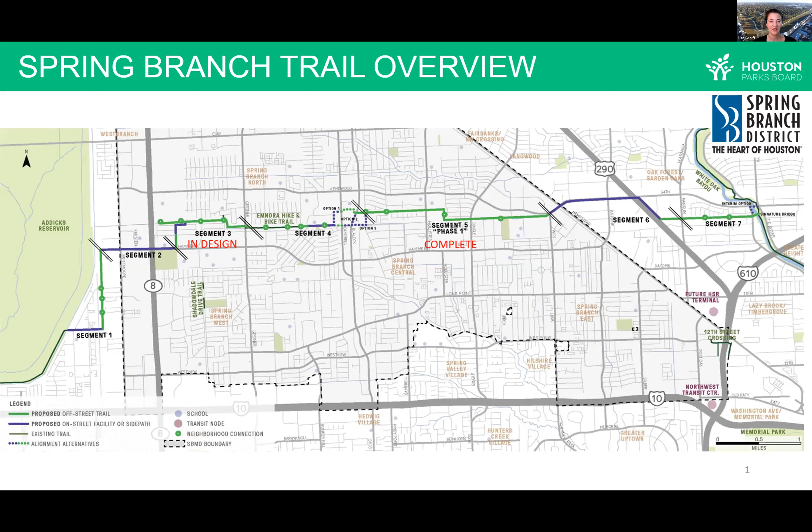The trail is being accomplished through an agreement between CenterPoint and the City of Houston that was signed in 2014. This agreement gives the City of Houston the ability to build trails on CenterPoint easements, with a few restrictions that you can see on the screen.

So it's a 10-foot wide concrete trail with kind of park rules, open dawn till dusk. It's mainly for walking and biking and passing through. It has a maintenance area on either side, with limited planting and other restrictions along the trail because they are CenterPoint utility easements.

You can also see on the screen that Houston Parks Board is involved - after the agreement was signed, we accomplished the pilot project off of Sims Bayou Greenway, which opened in 2019. You can see the opening there, and behind me is a photo of the Spring Branch Trail, the portion that has been completed.

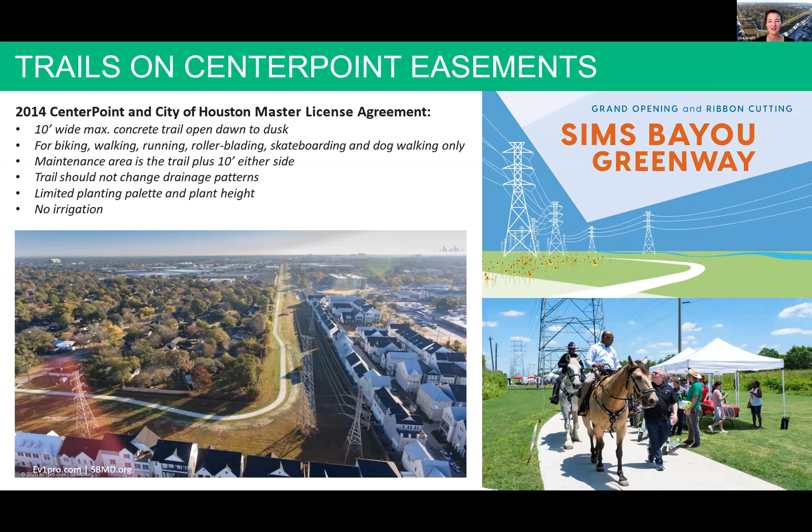Some of the amenities we are providing on these trails, typically similar to the Bayou Greenways, include mileage markers that double as 911 markers, so if you call 911 and give them the numbers on the little disc, they'll know exactly where to come and find you when things go wrong.

There's also signage similar to Bayou Greenway - you can see an image there of me and my dog, and a kind of gateway sign. Those are gateways or connections into the neighborhoods and parks that give you maps, information, and rules. Then there's directional signage and stop signs.

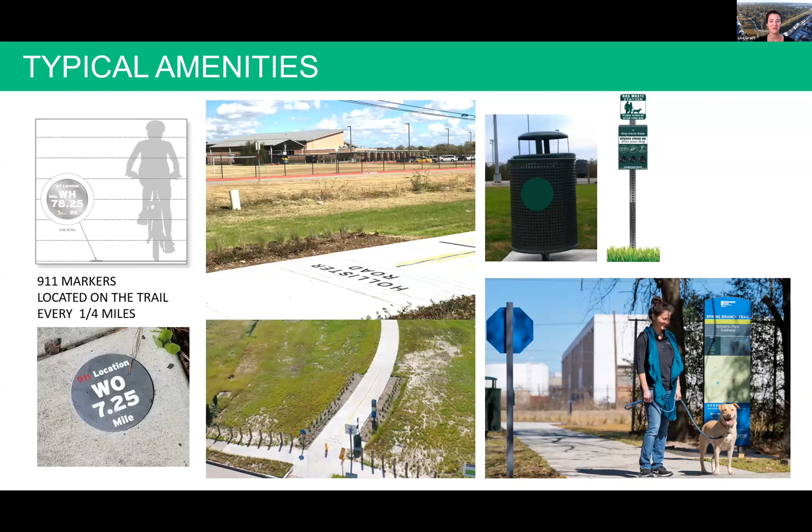At trail entrances there are bollards to prevent cars riding on the trails, as well as signage and some upgraded landscaping, plus dog waste and regular waste stations. So that is typically what you'll find along these trails.

At the same time the Spring Branch Management District was working on their comprehensive plan, Houston Parks Board was working on Beyond the Bayous and also identified this project as a potential important connectivity project in the area. The Beyond the Bayous study is a region-wide parks plan that connects greenways, trails, and parks of all sizes across Houston.

The goal really is to connect people, parks, and nature together throughout the region. The idea was that we started and created these amazing Bayou Greenways, 150 miles of trails that can connect up, and we wanted to really extend those benefits throughout the region and open up green space equitably so that people throughout the region can get to them and enjoy them.

On the screen you can see our regional connected network of greenways, and we had identified the Spring Branch Trail as one of the major ones. We are excited that a portion of the trail is underway - the total segments within Spring Branch Management District. We're really happy to be working with them and their vision for creating this trail within their area, as well as taking on the maintenance of it, which is extremely important.

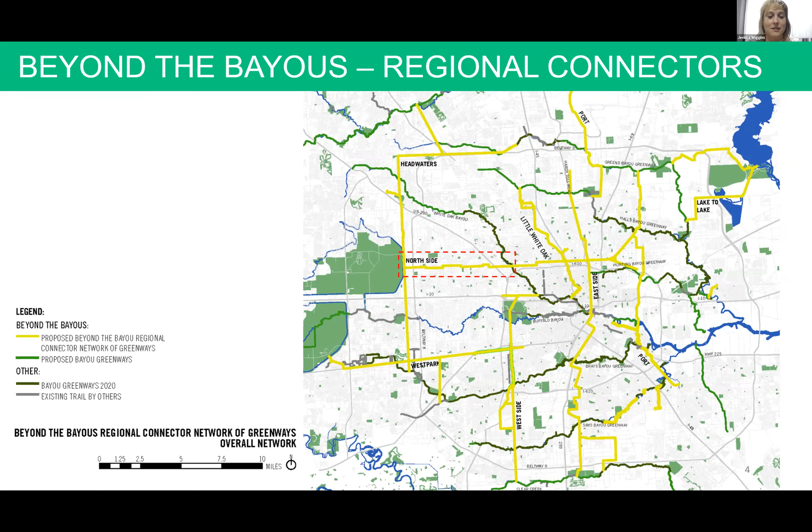Thanks so much, Lisa. That's really awesome that we're getting these regional connectors, connecting our bayous that really run well east-west, but making sure that we're connecting to things north-south and then beyond to bigger parks is really important. So thank you for that.

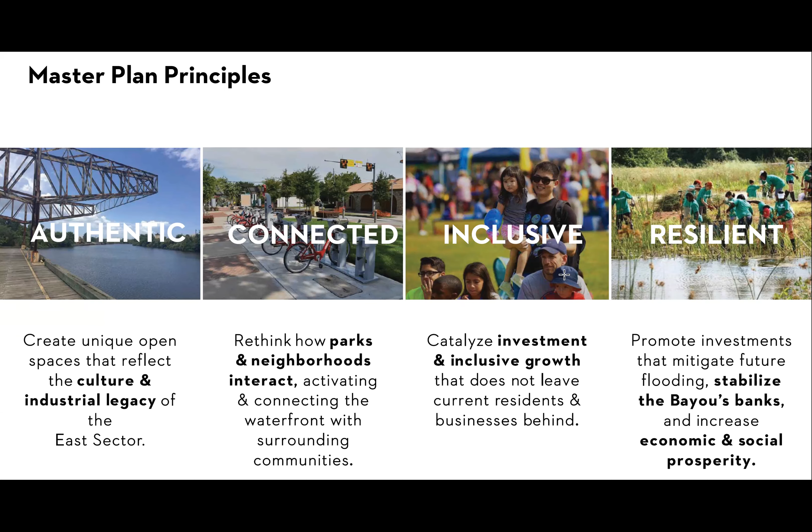So the master plan itself covers the area from essentially US 59 to the west, to the Port of Houston turning basin to the east. And the master plan identified about 43 miles of on- and off-street bikeways within this area.

In some instances, those are things we'll be doing ourselves, if it's on private property or we have an easement. In other instances, we'll partner with the East End District, Harrisburg TIRZ, Fifth Ward Redevelopment Corporation, Fifth Ward TIRZ, entities like that, to really implement this plan — along with the City of Houston, Harris County, a whole cast of characters to make this happen.

As I mentioned, right now we have some infrastructure and bikeways running east-west. The first priority is really to finish that network so you can travel east and west along the bayou. But just as important are the connections running north-south.

So people in the Fifth Ward can make it into the Second Ward, into Magnolia Park, up to Denver Harbor, and so on, so there's much more connectivity north-south. All of those neighborhoods then connect back to downtown and the entire bayou trail system we built through downtown and Buffalo Bayou Park, and then also to trails like the White Oak Bayou trails that Houston Parks Board have built, and some of the trails further south on Brays Bayou.

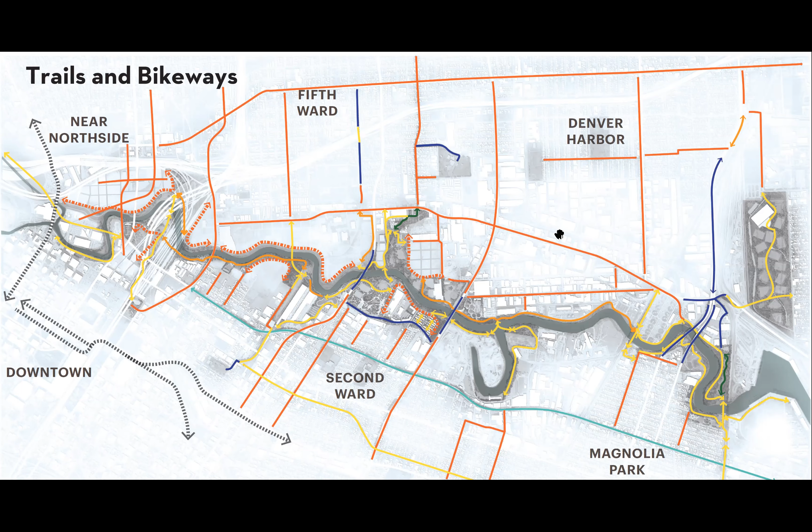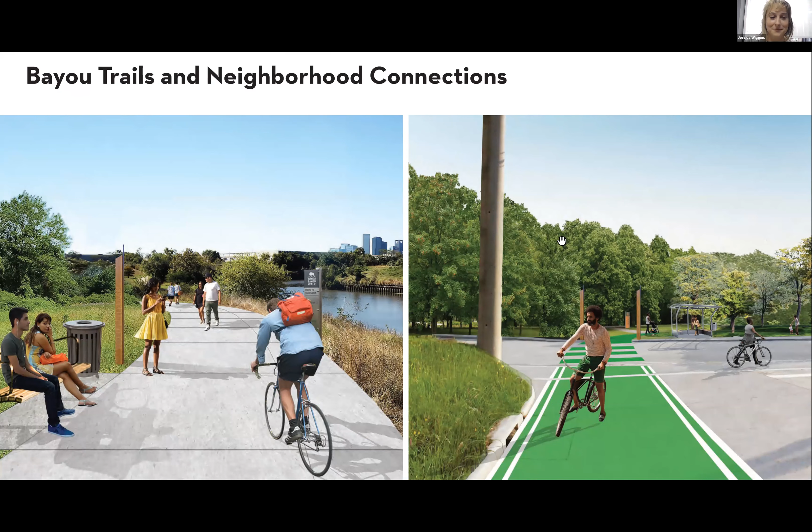So really connect this area to the whole Bayou trail, or the whole trail network in the city in general. The first thing we're really focusing on is the Bayou trails, and then connectivity in the neighborhood. And then the other big piece is really transforming navigation basically into a linear greenway, taking the excess capacity of navigation and making it into an amenity for the city. We actually just received a partnership grant from the Harris County Precinct 2 on this project. So that covers what we're doing, Buffalo Bayou Partnership.

Hey, Jose, that image looks familiar.

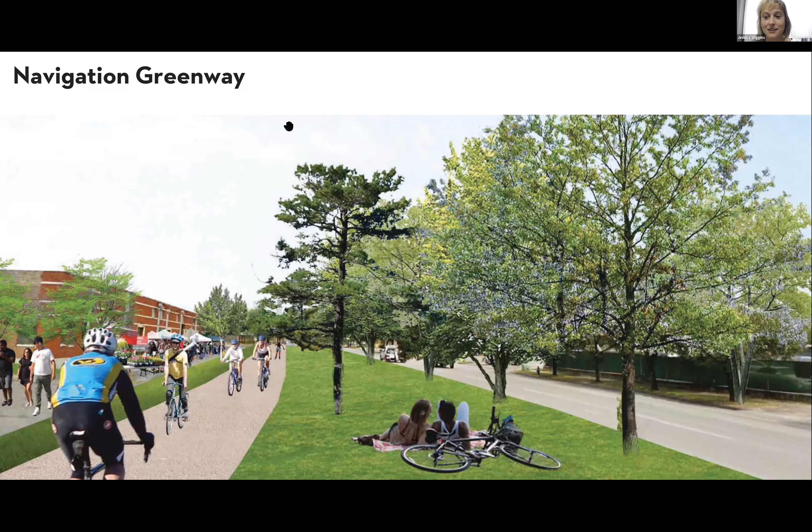Yes, that's awesome work. Thank you so much, Jose, for giving us an idea of what we have to look forward to from the Buffalo Bayou Partnership.

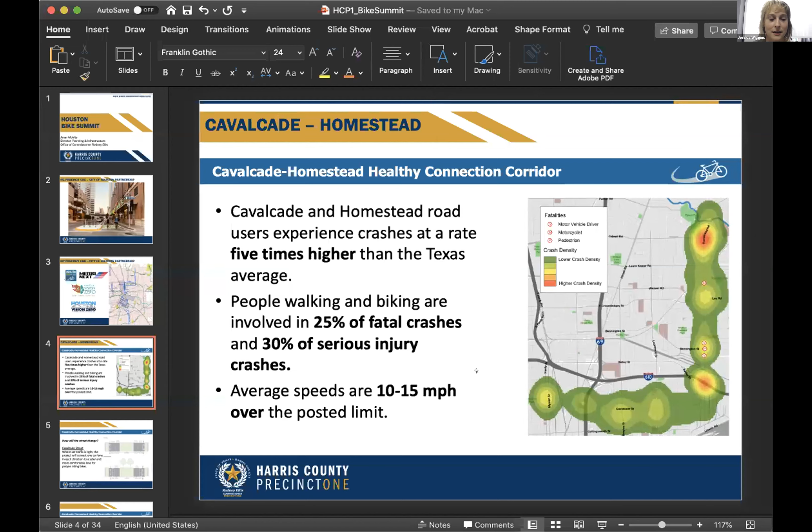Next up is someone who was my partner in crime when thinking about the Bill 50 Challenge, and really has helped spur some of Houston's first on-street bike lanes. I'm so excited to introduce Amar Mohite, who is the Director of Planning and Infrastructure with Harris County Precinct 1. Go ahead, Amar.

Thank you to Bike Houston and everyone, and Jessica for inviting me to the Houston Bike Summit. It's a pleasure to be with this group of members, panelists today. In 2017, I had the opportunity to join the team of Commissioner Rodney Ellis.

One of the early tasks I had was to jumpstart the implementation of the bike plan. After having completed the bike plan, it was a great opportunity for us to be able to implement these projects that came out of the bike plan.

Based on that partnership, the first Bill 50 Challenge and the partnership with the City of Houston, Harris County Precinct 1 implemented the first 18 miles of bikeway. We had just finished substantial completion on Austin 2 weeks ago. So it took 3 years to implement the project, but that one project connected 18 miles of high comfort network, connecting 3 complete communities, 3 major Bayou Greenway corridors, 4 universities, 11 schools, and educational facilities.

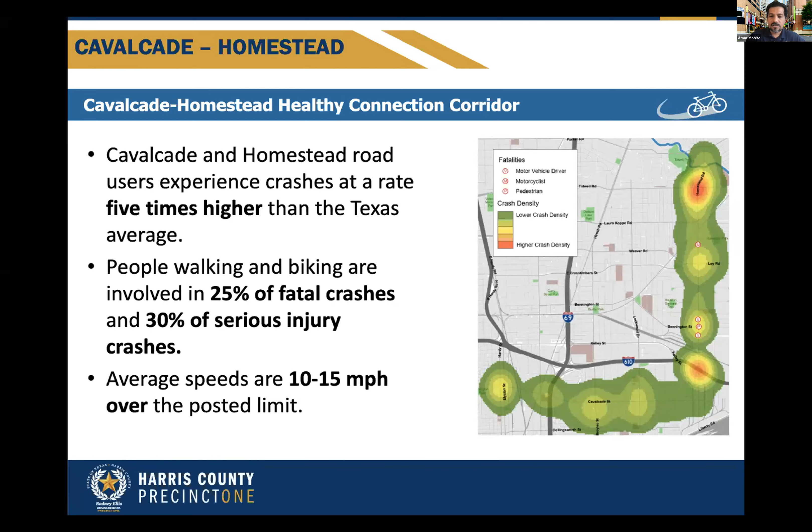So we are looking at how do you right-size the street. This would be implemented in a similar quick build fashion, but we would go through full design, with design and construction drawings on these projects.

On Cavalcade, we would be changing it from a 4-lane boulevard cross section with a 4-foot bike lane to 1 lane in each direction and a bike lane, which would improve safety.

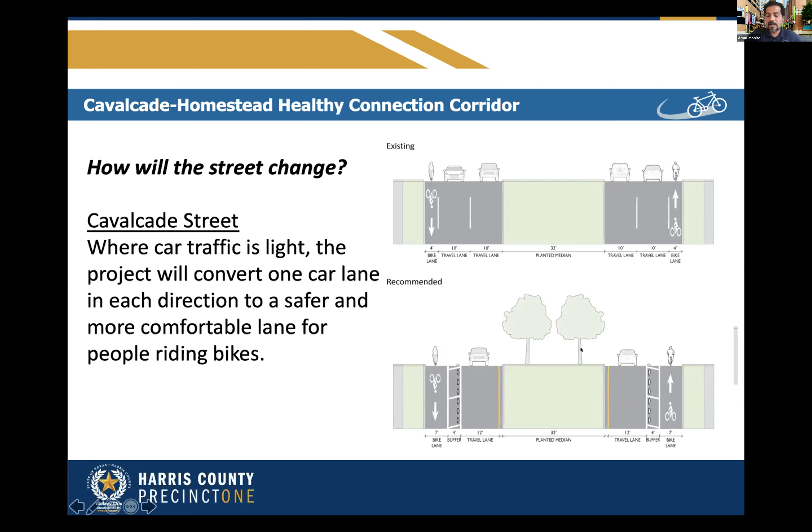Homestead is similarly a 6-lane boulevard, and we would be making it a 4-lane boulevard, allowing for a dedicated bike lane, similar to what we have with precast curbs, like you see on Austin Street. It won't be 2-way; it would be a dedicated 1-way bikeway along the segment.

As part of that, we are also working with Houston Parks Board and Harris County Flood Control District. We are also extending the Hunting Bayou Greenway all the way from Lockwood to Homestead.

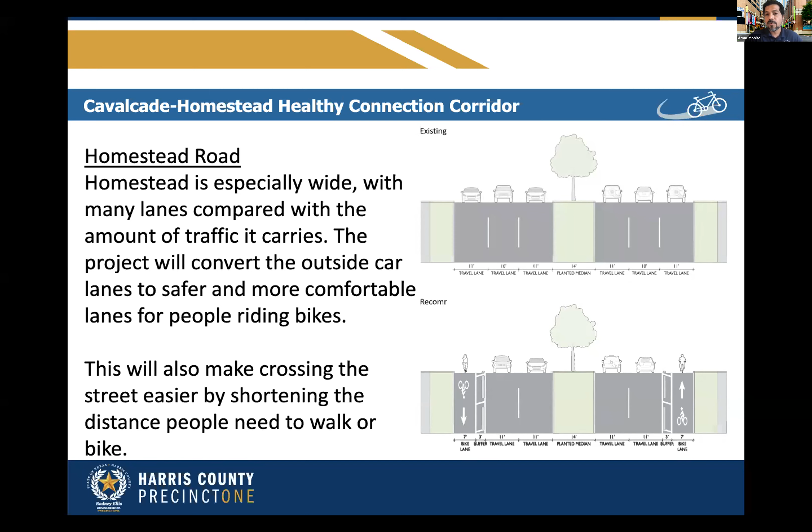So there would be a Bayou Greenway connection along this corridor. This also helps us improve safety, and as you can see from this slide, it significantly reduces the distance for people crossing the street.

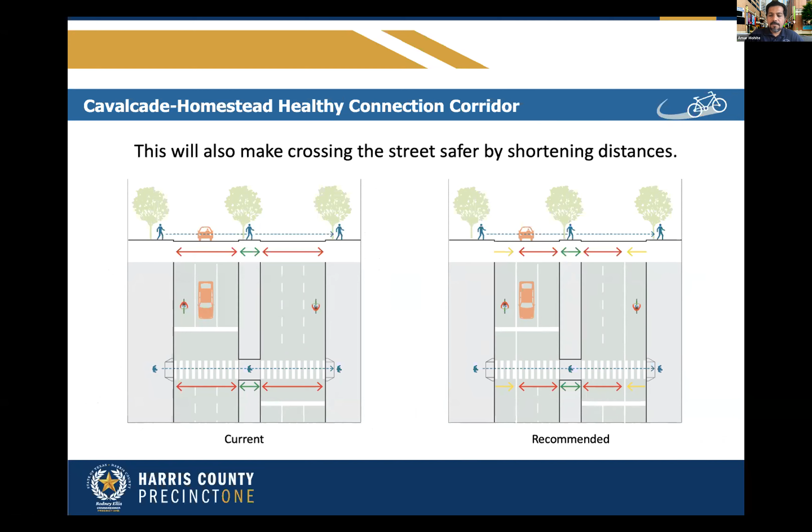I want to summarize and give you an overall picture of what Precinct 1 is doing beyond the 18 miles. This is part of an overall 30 miles of bikeways, trails, and 4 bridges being in various phases of study, design, and construction right now. I think 25 of those miles are within the city of Houston, and another 5 miles in the unincorporated area.

I'm very happy to share that we are doing our first protected bike lane. We're ready to award the project to a contractor in unincorporated Harris County, and I'm really excited about expanding this infrastructure to unincorporated Harris County as well.

So the big thing about this is partnerships. Partnerships are important. It's the best way to help implement projects within our region, working with multiple partners. So thank you, and I'll pass this back to you, Jessica.

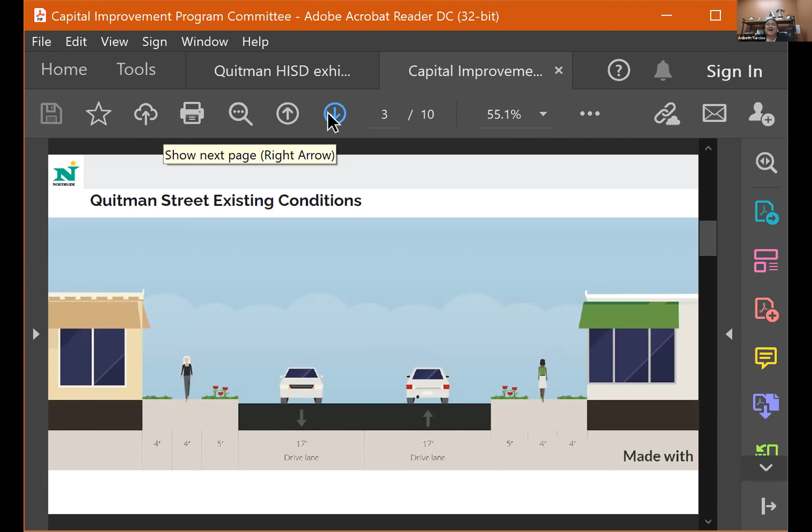So the management district ended up applying for the Houston-Galveston Area Council TIP call for projects. We received the grant back in 2015, and it talked about a lot of the enhancements we're going to do as far as pedestrian-oriented lighting, ADA ramps, crosswalks, but it was only going to be from South Street to Gano Street.

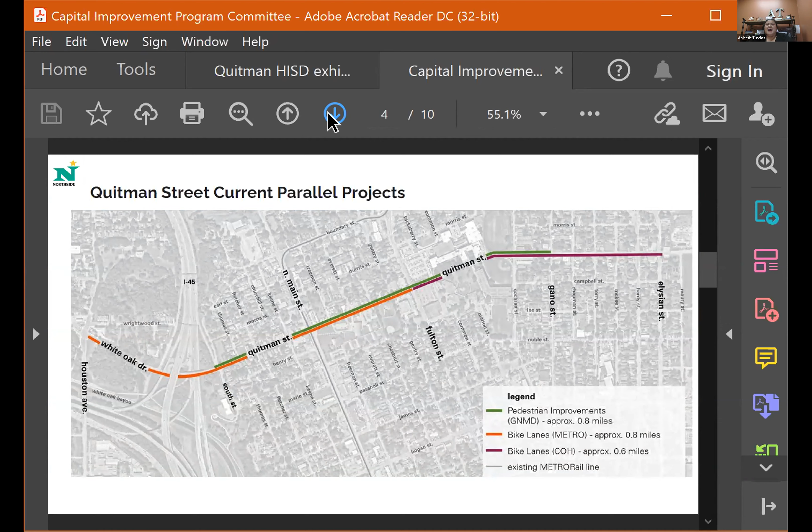One of the things we discovered as we talked more about this opportunity with the TIP grant was that the city and Metro were also working on parallel projects along Quitman, not to the same extent as where we were looking from South to Gano, but in the outskirts of Quitman. So we started talking to all of our partners.

And from all those conversations, this actually became a partnership project. The project now entails Commissioner Adrian Garcia, the city of Houston, and the management district. Within the district we've been partnered with a lot of organizations because of what was going on with Quitman and all the parallel efforts. Then Metro came in and said, hey, we want to be a part of this project too. So now with all the partners together, this is going to become a grander scale project.

Just to give you an idea of the numbers: when we received the HGAC grant, we received a total of close to $2 million in funds. Now, with all of the interlocal agreements with Metro, Commissioner Garcia, and the city of Houston, it's going to be a project of about $6.7 million.

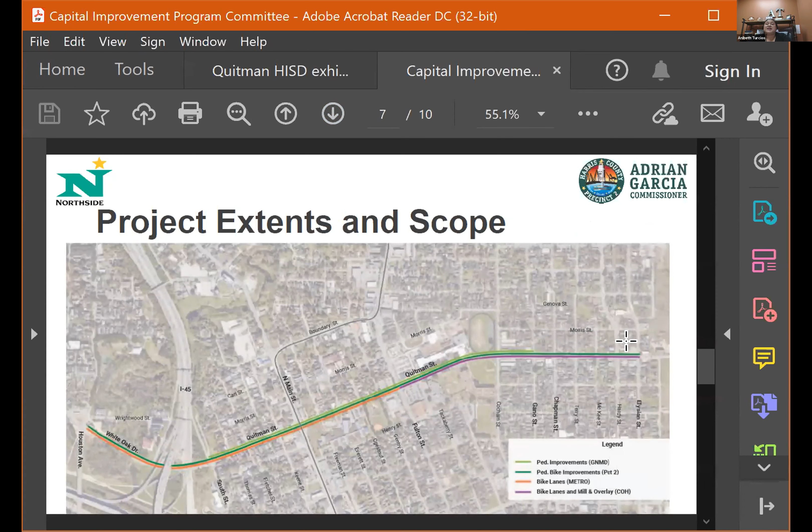So to give you a scope now, the project has gone from south to Gano, and is now extending from Houston Avenue to Elysian. This actually connects over to a project Amar mentioned earlier with Elysian and Hardy, which Jessica mentioned was one of the catalyst projects here in the north side. So now with Quitman, we're able to connect it over.

Just to give you a proposed section of how this will look: the Quitman drive lanes will now be reduced to 11 feet, and bike lanes will be 6 feet. We're actually looking at doing bi-directional bike lanes.

This is the first time in the north side that this will exist, and in Houston there are not many of them either, so this will definitely be a catalyst project. There will be 6-foot sidewalks and some landscaping, and because of the partnership with Metro, there will also be a few sections with floating bus stops.

Just to give you some ideas on design elements, we're looking at different designs from lighting, sidewalks, as far as concrete art, those sorts of things that are coming up in the pipeline. We are actually still in design, so we are definitely looking for this project to be completed and starting construction in 2022.

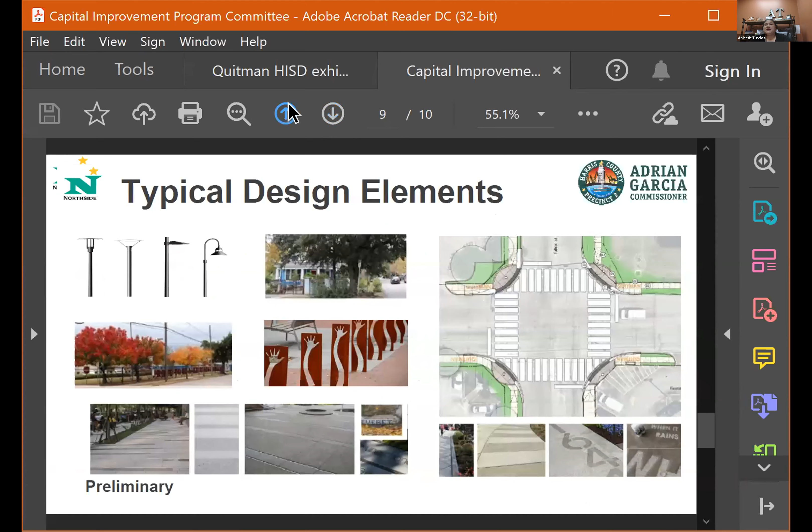What I do want to add onto this project is it's becoming a project that will connect businesses, jobs, services. The partnership will serve as a catalyst project to improve connectivity within the area to the businesses, neighborhood, commercial thoroughfare, TOD development. It does a lot with the project. As Amar and other partners have mentioned, we cannot do this alone, and having our partners from Precinct 2, the city, and Metro is making this a one-of-a-kind project that we look forward to introducing to everybody next year.

Jessica had asked a question about challenges. I think the big challenge is time. We've been working on this project for quite some time, and that has been something of how do you still keep it in the minds of community members, of our stakeholders, that this is coming. It's not overnight. So we definitely look forward to having a couple of community meetings soon to share more of the design, and if you're available to come, definitely visit with us so we can get your input into this one-of-a-kind project on Quitman. Thank you so much again.

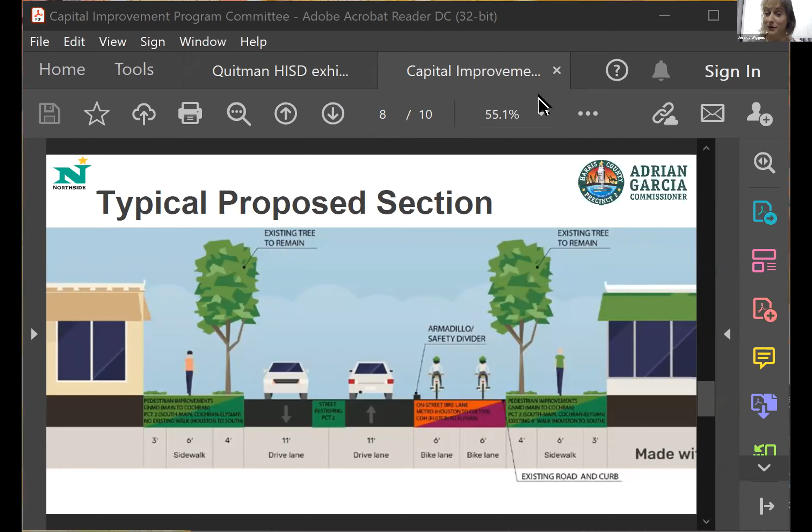Awesome, thank you Annabeth. It's really great to know that our management districts are being so thoughtful about the bike infrastructure, not only what's on the street but what complements the bike lane too, thinking about lighting, bike parking, and community engagement. That's really encouraging and impressive. Now I'm going to introduce an impressive person, the president of just about everything, including the Memorial Heights Redevelopment Authority, and longtime champion of people who walk, bike, and take transit in the city of Houston.

Sherry Weesner: Thank you, Jessica. This is a complete reconstruction of Shepherd and Durham and selected cross streets, from the Bayou all the way north to 610, covering cross streets including 24th, 20th, 19th, 18th, 16th, 15th, 14th, 12th, and 11th.

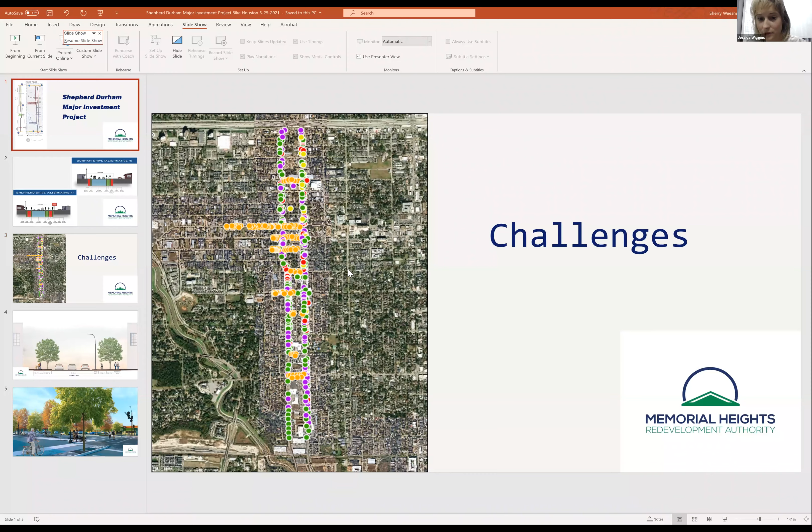Did I lose you guys? I'm sorry. Yes, I believe we did. Okay, you're back. All right.

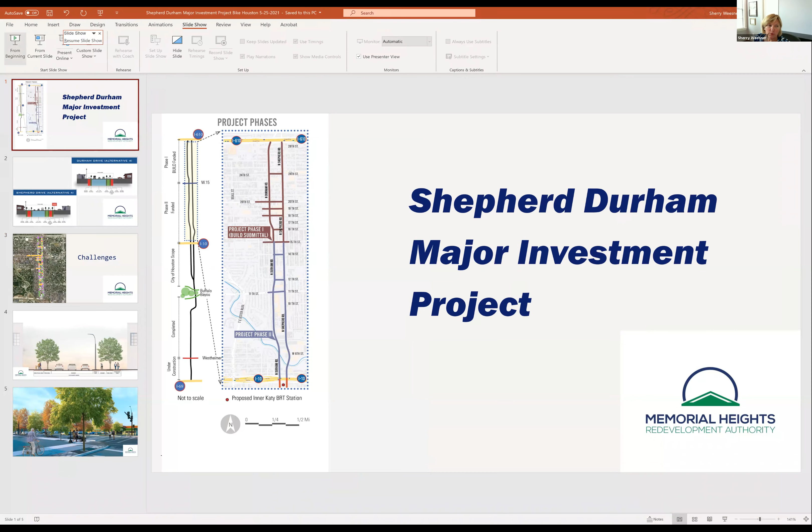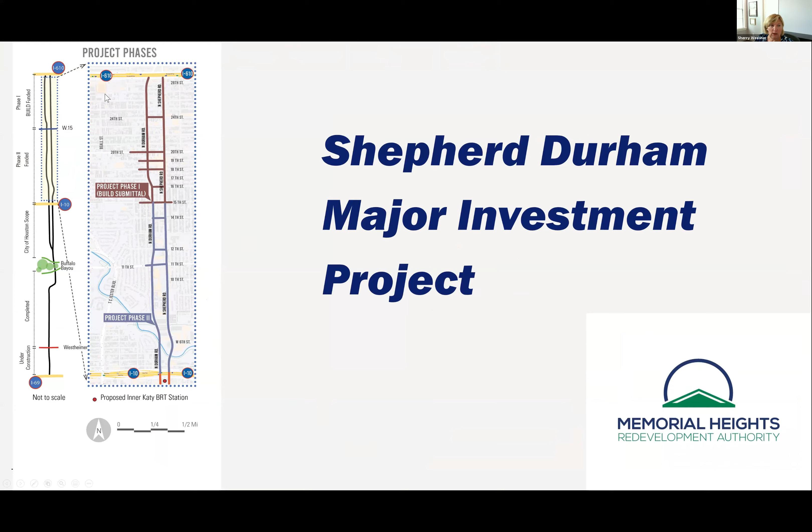This is a unique situation because we are able to actually reduce congestion, improve transit access, improve the pedestrian realm, and add bike facilities on Shepherd Durham. We're able to do this by right-sizing the street, so we will have 3 through lanes, turning lanes where needed, and improved pedestrian realm and bike facilities. We're also replacing water and wastewater lines, improving stormwater management, replacing traffic signals, replacing street lights, and providing bike and pedestrian connections to the Bayou trails, to the trails at 7th, and to connect with the city project on 11th Street.

The right-of-way varies between 60 and 70 feet, so the cross-section will vary to some extent. Bike lanes are going to be on the east side of each street. The reason for that is there's more right-of-way on Shepherd, so we can have floating bus stops there. On Durham, we have less right-of-way, so we're putting the bike lanes on the east side to avoid conflicts.

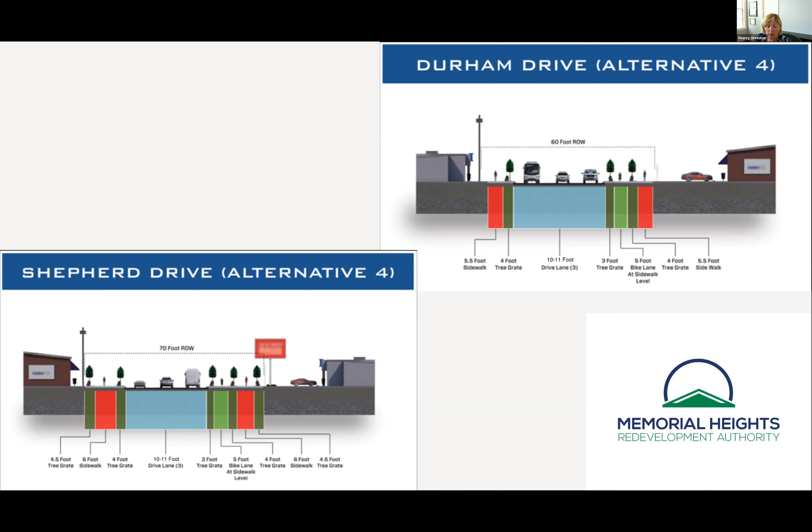I wanted to talk to you guys a little bit about challenges, because all of us face challenges as we do these projects. There were several challenges as we worked on this project. Of course funding was a big issue, but we were able to win a federal BUILD grant of $25 million and TIP funding of $40 million. The city is using funds from the City of Houston water system for water and wastewater line replacement, and Memorial Heights issued bonds.

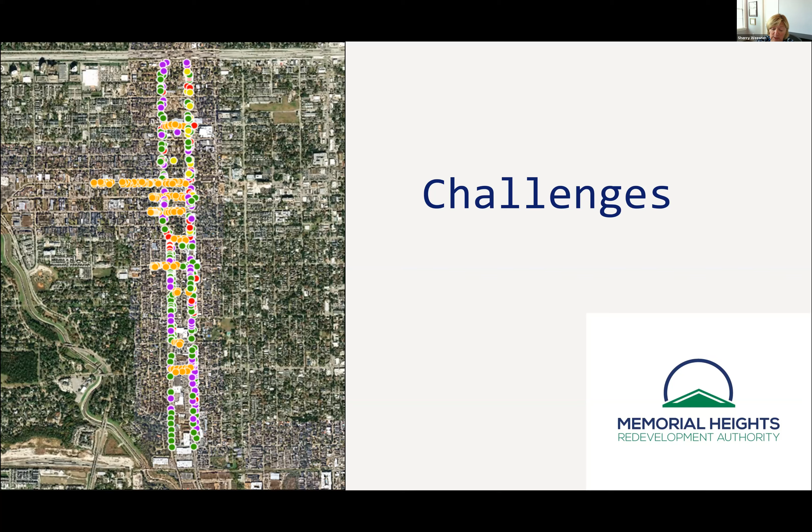However, this is a special problem in Houston. Houston's record system for driveway permits is not robust. Many people have extended their driveways or added driveways without a permit. Houston doesn't have strong shared access requirements, which could reduce the number of driveways. Many other cities in the area, like Friendswood, League City, or Sugar Land, have much stronger requirements, which reduce the number of driveways and the conflicts between automobiles, pedestrians, and bicycles. I believe both right-of-way encroachments and driveway management are things that will need to be strengthened if we're going to have a truly walkable and bike-friendly city.

Even after saying that, we were able to come up with the money for this project. We're working through the right-of-way encroachment issues and managing the driveway issues to the best of our ability within the city's framework. In the end, we'll have a wonderful complete street that provides great north-south access for automobile users, transit riders, pedestrians, and bicycles. I know everybody at this event is very interested in the bicycle part, but when we can make it better for everyone, the projects get more support and everybody's happier.

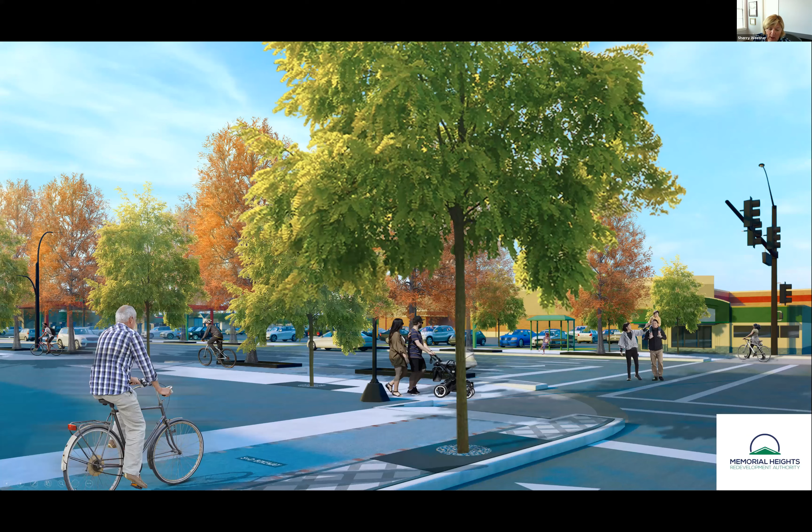So there's no management district on the Shepherd Durham area, so we're building to city standard. But we are using this opportunity to push the envelope to create a great street that's aesthetically appealing, and we're working hard to create a street that provides safe access for all users, is inviting, where people want to be, and that supports the business community and our community in general. So we're very excited about this project.

TIRZ 5 is also doing a lot of other projects. We're doing an improvement on Heights. We're improving the MKT. We're adding bike lanes on West Dallas. So we're doing a lot of things that are going to help make the network for bikes and pedestrians better. Thanks, Jessica. Wonderful.

Thank you, Sherry. I think you touched on a point that's probably one of the most important things we're facing when moving forward with this bike infrastructure, which is that policy matters. Whether it be a walkable places ordinance, dealing with driveways, or our infrastructure design manual, our policies need to be in place in order for our infrastructure to thrive and serve people in the way that we need it to. So thank you for bringing that up, and again, a great topic to start.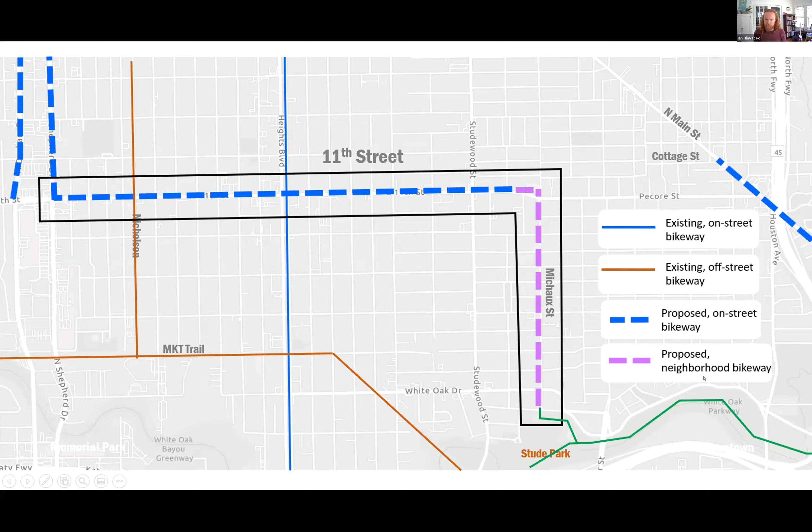11th Street actually has two slightly different cross sections—west of Heights and east of Heights look a little different. To provide a very high comfort, safe bicycle facility west of Heights, what we heard from the community is that was a priority. But at the same time, we wanted to make sure we had safe vehicle and bus travel and interactions too.

So what we're going to do, as a compromise we've worked out and hashed out with the community, is build a median down the middle of the road with left turns at strategic locations. That gives us more space for the bike lane and any delineation we'll be adding. East of Heights, we have a little more room and can actually get that turn lane. We're still working on some of the lane widths, but it gets us enough space to provide just about everything.

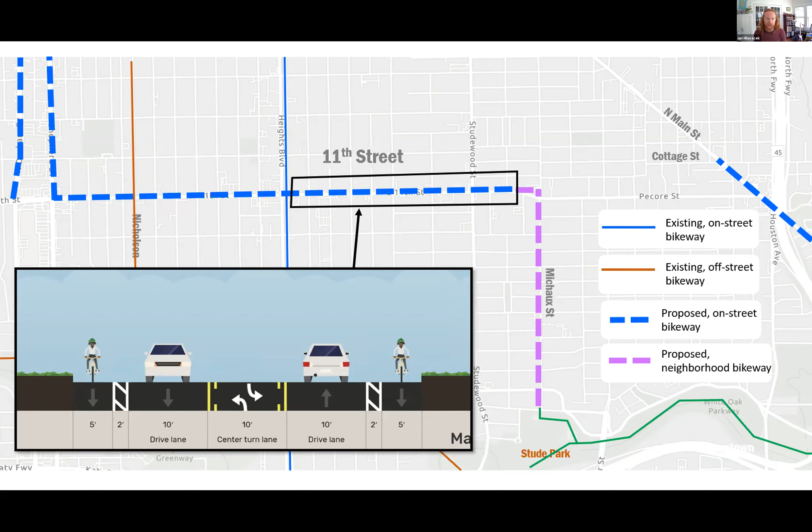A couple of the intersection improvements—of course Nicholson at 11th Street is one of our priorities. That was one of Bike Houston's identified dangerous intersections. Working with Public Works for a number of years, the community has talked about this intersection a long time, and we've tried to do a lot of things here, but it's exciting that we can actually come through with what I think will be a great improvement and really solve it.

And, you know, if we need to do more, we can, but this gives us a tool to make that crossing better. At the same time, we looked to do something on Heights Boulevard as well, because we saw some dramatic needs there. In most of my life growing up in Houston, I'm like Jessica—I'm from Houston, and we're a rare breed sometimes. But I always drove through here, and driving through this intersection has always been terrible. Now that I understand how transportation works and want to bike more places, it's just not bike friendly. It doesn't work for anybody.

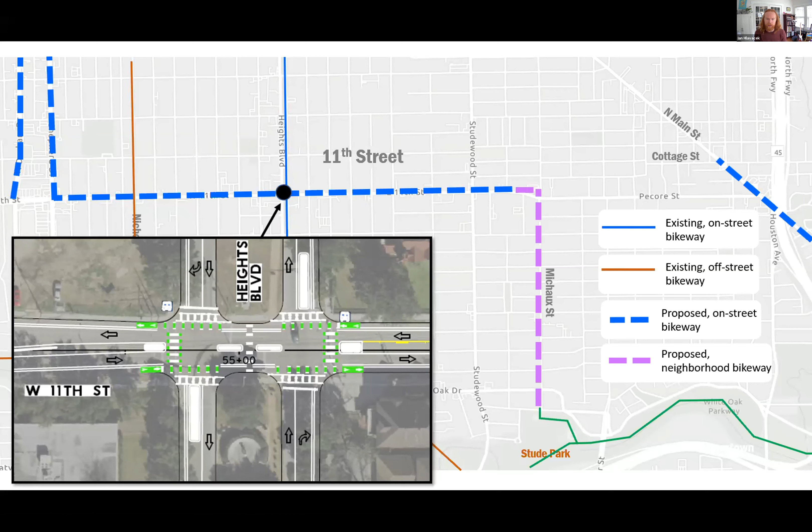So what we're going to be doing there is a dramatic series of turn restrictions and median crossings. We're going to try to serve the trail on Heights Boulevard better, and we're looking at floating bus stops to serve the transit lines that run along there. That'll give us enough space to provide bike lanes all the way through. The trade-off is that we'll have to restrict some of the left turn lanes, but the grid network of the roadway in the area leads us to believe that's going to work.

Cool. And then finally, we're going to do a very similar treatment. Am I out of time, Jessica? Ian, you're at time—we're going to have to pass the baton.

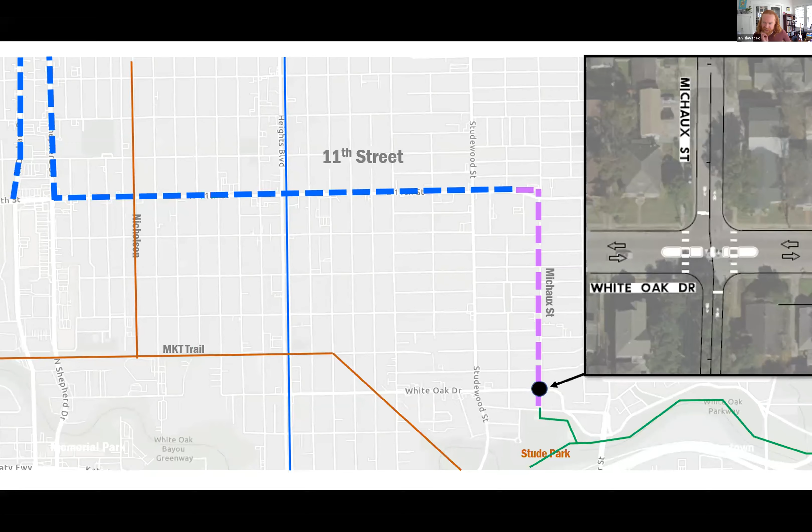Okay, well, this last intersection—sure, let me go to the last slide. I think this is useful for everybody. We're currently under design, we'll be moving into construction this fall, and I think we'll be able to finish either by the end of the year or early next year.

So at long last, we'll be getting something out on 11th Street. Thank you. Great, thank you.

And as Ian mentioned, the community and Bike Houston was really instrumental in getting these improvements done and made. That really speaks to the power that not only government agencies, but nonprofit organizations and regular everyday people can have in moving things forward.

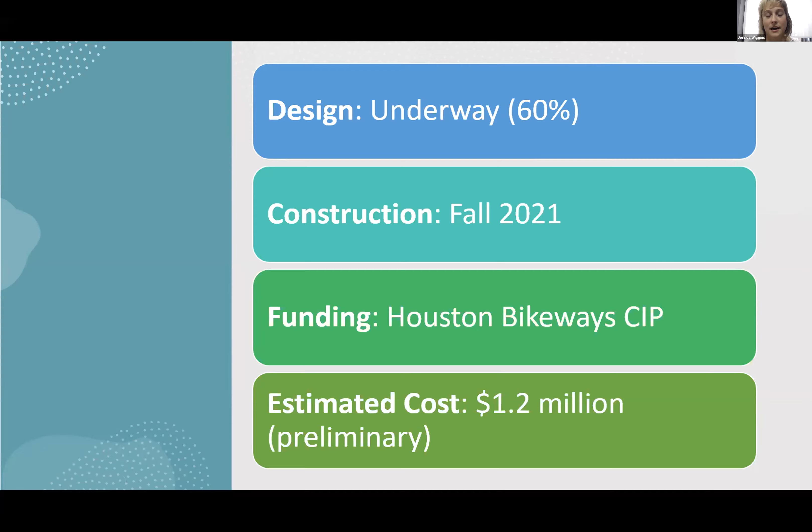And that's exactly what Ann Whitlock did in the Gulfton Sharpstown area. I don't know if you've read in the Houston Chronicle, they wrote about the improvements happening at Hillcroft, and Ann can tell you a little bit more. Ann Whitlock, founding director, Connect Community. Welcome and tell us about your project.

Thank you, Jessica, and thank you, Joe, for having me here today. I'm going to give a brief introduction to our project. It's probably going to start to sound hauntingly familiar to all the other projects, so I'll try to change it up a little bit. I'm the director of Connect Community, a place-based community development organization in the Gulfton neighborhood, just west of Bellaire and south of Galleria. We really got involved in walkable streets when a young boy was killed in an intersection about 4 years ago, and Connect made a commitment to the family and the neighborhood that we would work on making streets more safe.

Because this is a walking neighborhood, it is paramount that we do that. So I'm going to take you on a quick video tour of Gulfton. We have 3 streets that we're working on, which sprang from a partnership with Together for Safer Roads, and then working with TEI to develop a plan. It was funded jointly with the Public Works Department and the Southwest Management District at the TIRZ. I have to give lots of shout outs to the Public Works Department and to the TIRZ, they've been incredible partners throughout this whole process, and I think we're going to come up with a really great project when this is all done. So I will share my screen and play a little video.

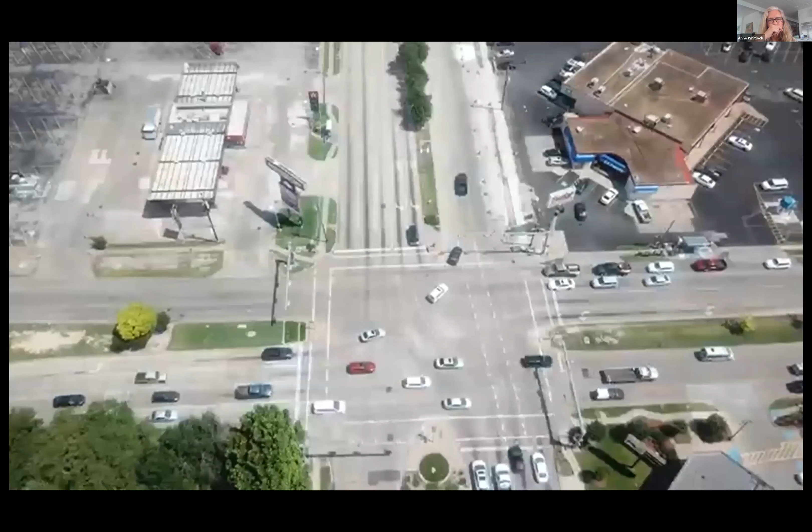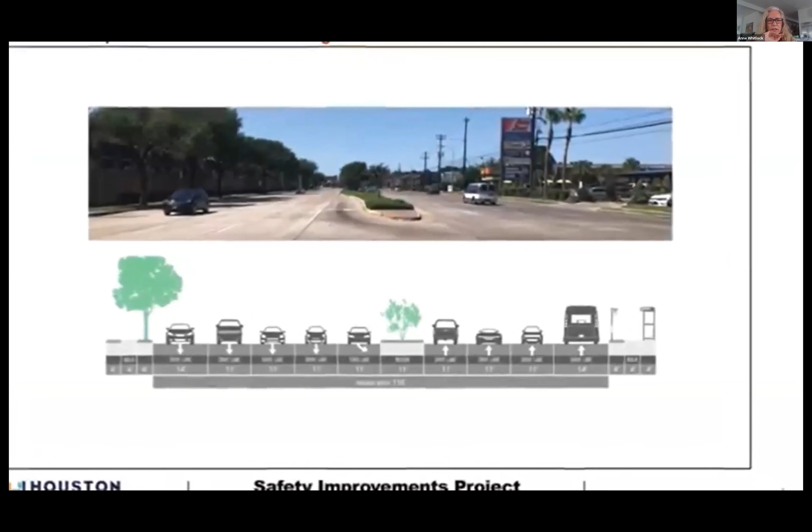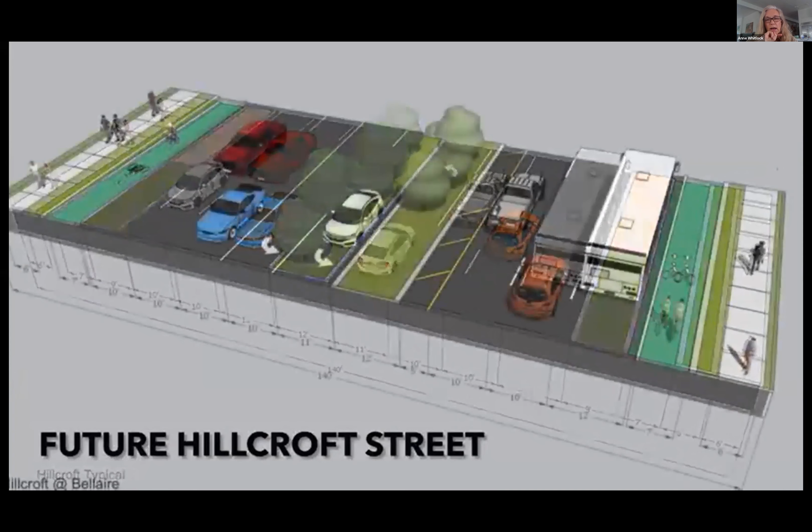So you can see that the lanes are, this is Hillcroft, an 8-lane road currently, vastly oversized for the traffic it pushes through. This is current conditions on Hillcroft, and this is what we've actually launched. We're in the process of doing this first phase on Hillcroft with the expansion of the sidewalks to 6 and sometimes 8 feet, and then we'll have dedicated turning lanes onto Bellaire coming from the north of Hillcroft.

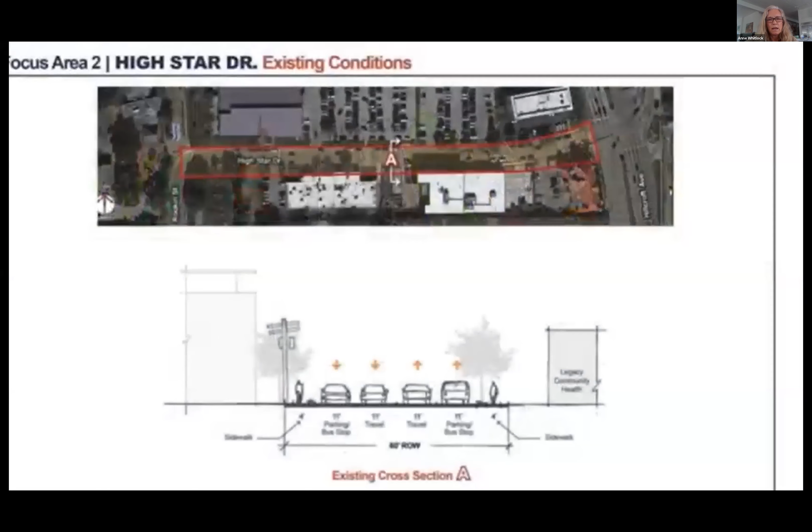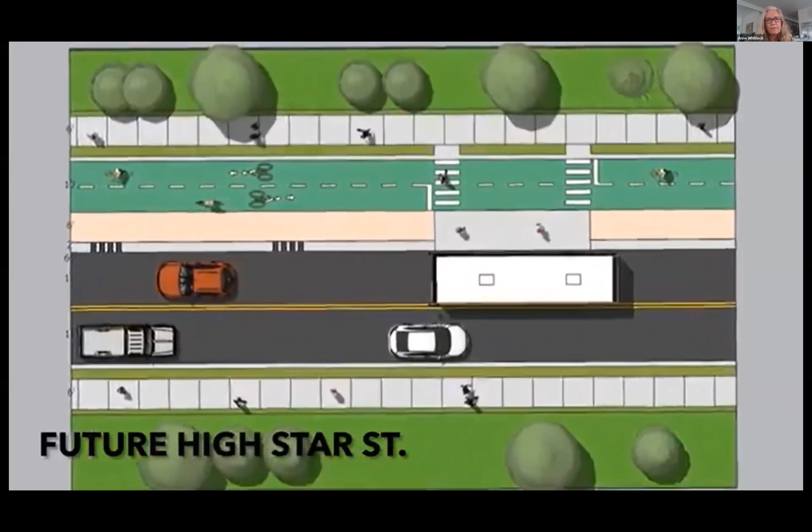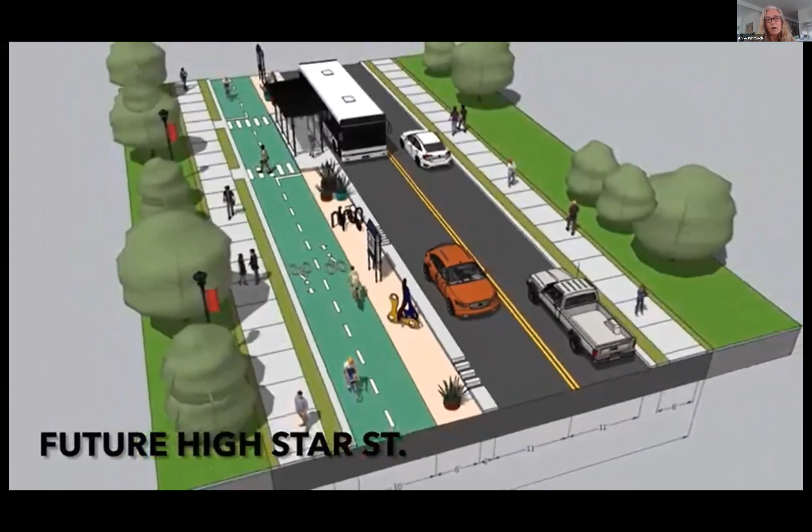And this is High Star, which is where Legacy and Baker Ripley and the city's health department all are. We're going to have a bike lane and a floating bus stop, and then 8-foot sidewalks. Because this is a walking community, it's super important that we have buffered spaces, because we also have a lot of cars on this road.

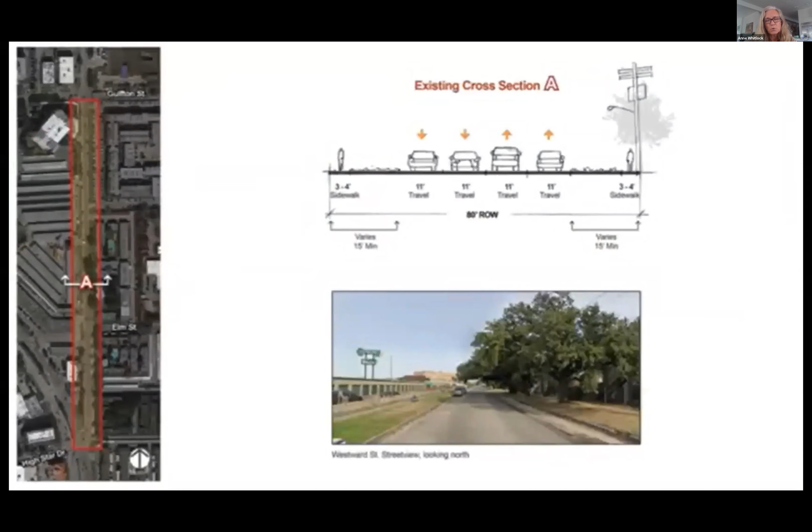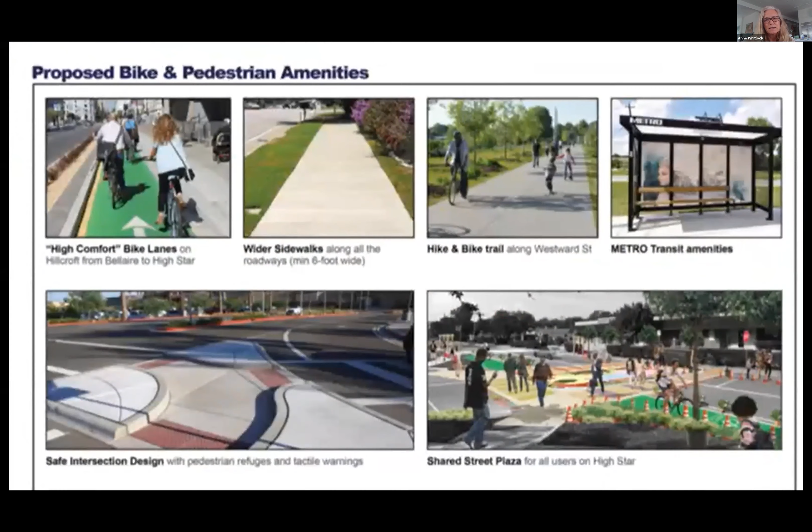And then this is Westward Street, which kind of doglegs off of Hillcroft, will basically be a hike and bike trail. It'll be 10-foot wide sidewalks. Now, I was so happy to hear Lisa Graiff say that she's looking for partners for her expanded network of CenterPoint easements, because we really want the Westpark CenterPoint easement to come to fruition, since this would connect straight into that project.

And this is a neighborhood that uses biking as a mode of transportation, people biking to jobs, either to Galleria or to the Hillcroft Transit Center, or south towards Sugar Land. So as I said, we launched the first phase, Public Works is expanding the sidewalks on Hillcroft, and next they'll move into doing the dedicated bike lanes. I foresee our biggest challenge being that this is not a neighborhood that has ever seen a bike lane before, and we're asking people to give up parking spaces on High Star. That's where I think a lot of community outreach is going to need to happen, not just from Connect but from all of our partners, to come with a unified message that this is a good thing.

So that's my presentation. Thanks so much, Ann.

Again, this was another area where we, as Bike Houston, really focused in on too, and it's great to see that there's so much progress being made.

Our last guest is David Fields, the Chief Transportation Officer for the City of Houston. I just want to say that about 3 years ago, Bike Houston asked that your position exist, and I'm so glad that you're here, and we created a spot for you, and you're doing this great work. So welcome, David.

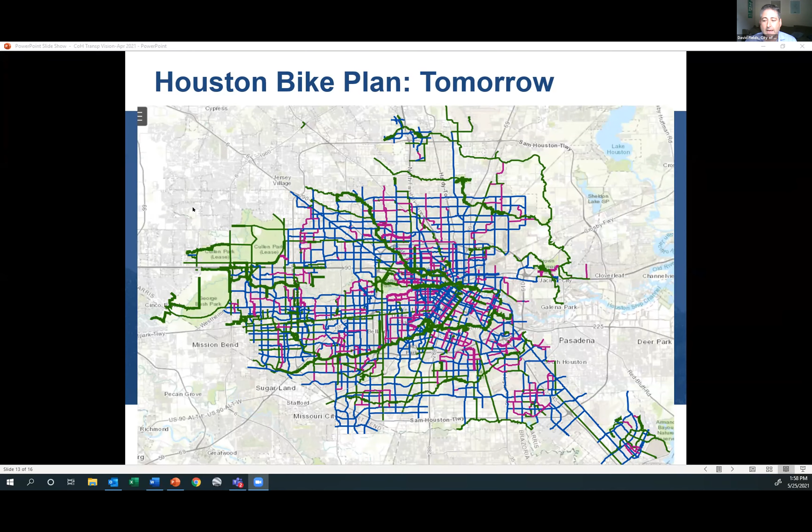But honestly, we can't just start anywhere. Everybody has their own favorite project, and every person we hear from can make a very solid case for why their project should be the next one. What we are doing, instead of just saying yes to whoever can be loudest or whoever knows the right phone number to call, is work on a data-driven approach, which is being led by Brian Smith in our Transportation Planning Division, with coordination with our Bicycle Advisory Committee.

This bike prioritization exercise is based on 4 factors: safety, equity, demand, and connectivity. And we're going to be able to run every one of these routes through that formula and figure out which are the highest of the highest priorities, and then start assigning that into our capital programs, as well as identifying which of our partners may be working on pieces at the same time, so we can get a little further down our list.

And when you ask why those factors specifically, it's a couple of things. One, that's what we've heard from the community, but all of this goes back to the city's overall plans. Obviously the bike plan, but it also connects to our Vision Zero action plan, Resilient Houston, and the Climate Action Plan. Every time somebody says, well, what are you going to work on next? We say, well, we went back to our plans and we developed a methodology to support it.

And we're going to work every single day to get this map up and running in order to support our goals. And at the end of the day, we hope everybody's going to be able to work with us, all the partners on this call and everybody who has joined us to participate, to implement this very, very wide-ranging and very robust bike plan. Thank you.

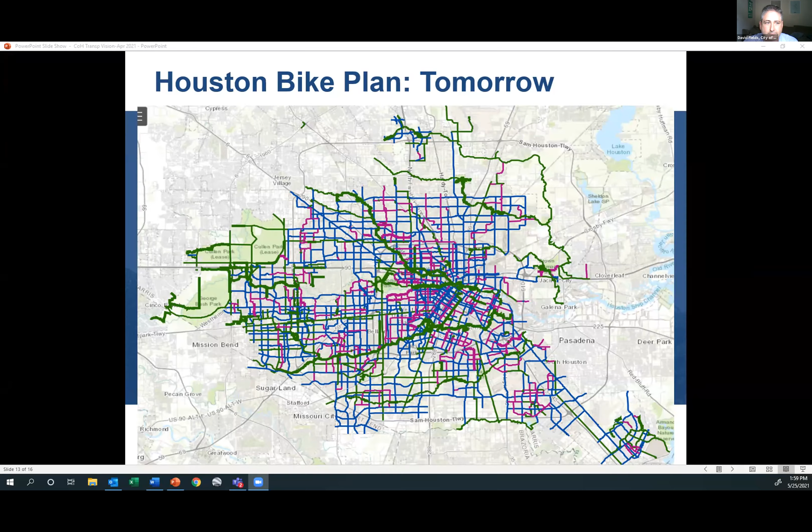Wonderful. Thank you, David. It's really exciting to know that the city's vision is to cover the whole city in bikeways. And with that, I'll hand it over to Joanna Stratman with Bike Houston.

Hi, thanks again to Jessica and all the panelists today, and for all your hard work expanding and developing the biking infrastructure in the area. As Jessica said, my name is Joanna Stratman and I'm a member of the Bike Houston Board of Directors. I'm originally from the UK and grew up in the London area, and biking has basically been part of my life for as long as I can remember. I would really like the same to be true for my 5-year-old twin boys, especially as they're off their training wheels. So I'm really excited and passionate about biking infrastructure that's connected, inclusive, safe, and accessible enough for even the youngest of bikers.